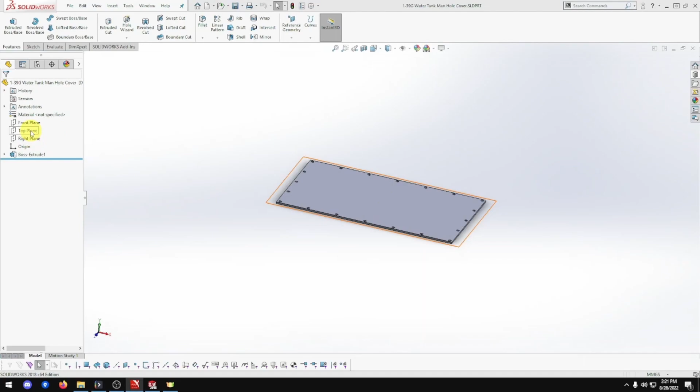Pretty much all we're doing is adding a handle to this. So we go to front plane, normal to. Sketch.

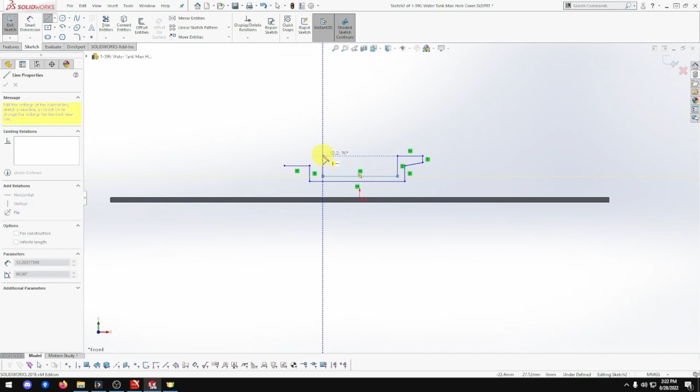The handle, you can make this part separate and assemble it, but I'm just going to do it on here. So let's see, there, across there, up there. Oh dang it. There we go, that's fine. Yeah, just make that horizontal. There we go. Now just make sure those two are there. Beautiful.

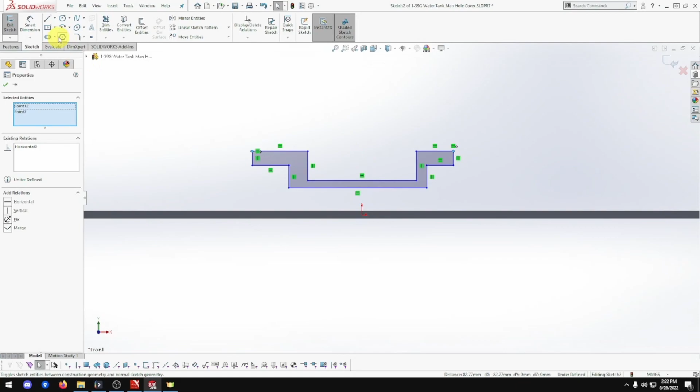Now actually, you know what, let me save a bit of time. Let me just delete that one. Put that one there. Oh, those two should have lined up. There we go, this will eventually join there. I'm just keeping it above so I can see. Now let me pull out these dimensions first.

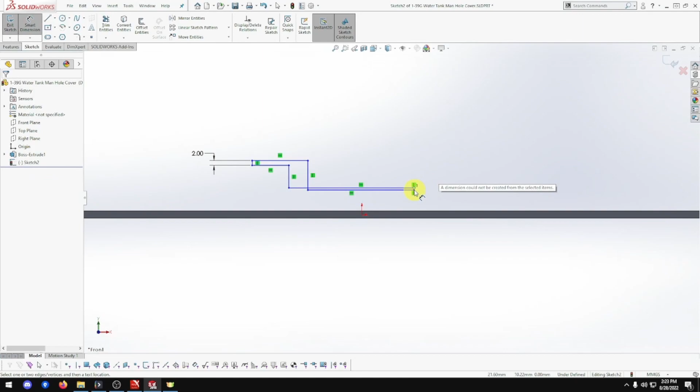So this is going to be 2 mil, 2 mil thick. Thank you, 2 mil. Those 2 points are going to be... oh missed. Okay, these two. Yep, I went too far. These two going to be 2 mil. Beautiful. I didn't get too far, it's going to be 2 mil.

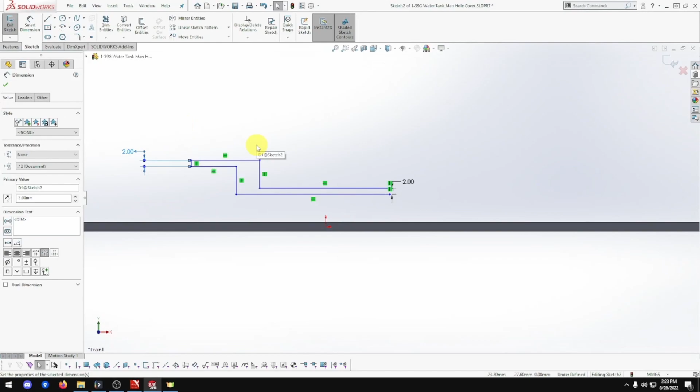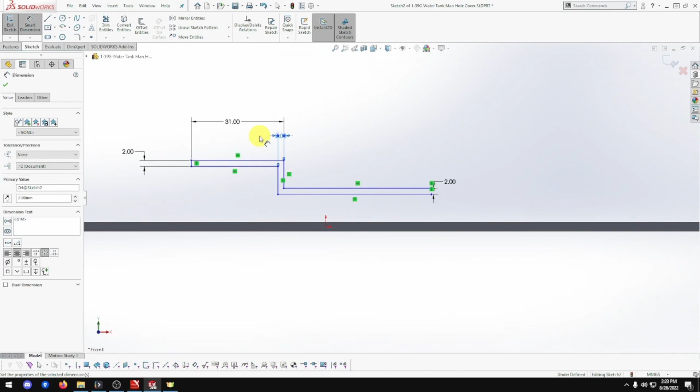Excellent. Okay, so now from this line here to that point there is going to be 31. From this line to this line will be 2 as well. 31. So from this here to that point, that point, thank you, is going to be 142 divided by 2.

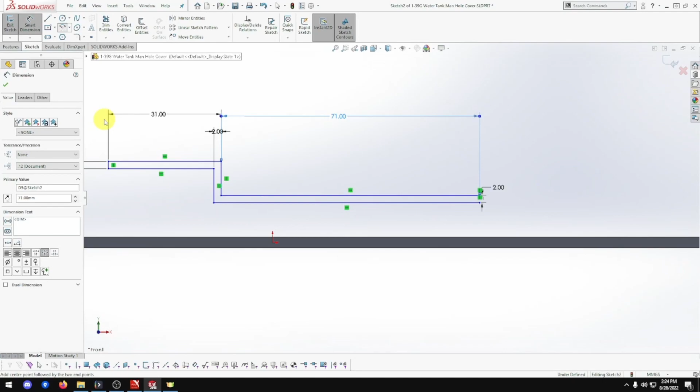Okay, so that should be all the measurements for now, but we want to do a curve there and a curve there. Okay, before we go any further, let me just do these up. Oh, right one, we want that horizontal, not vertical. At least now you can go around that way. And these two. There we go.

Now, before I lock that in, let me just do this. Going to be 5 mil, I believe that one is. Yep, radius of 5 mil. And this one's going to be 3. Yes, it is, 3 mil.

There we go. So this point and this line will join up. This point and this line will join up. This point and this line will join up, and join up. Now we're going further, this one trim. Those two, and those two. We still got to curve these two.

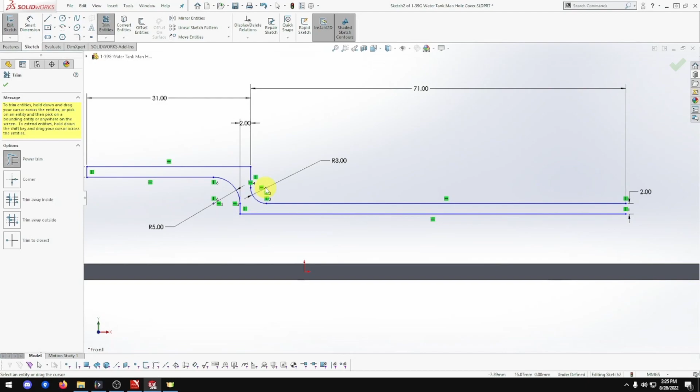Actually, you know what, why am I doing that? Delete that, delete that. We'll do fillet, that's going to be so much easier. We'll do fillet. Okay, so this point and this point will be horizontal. There we go.

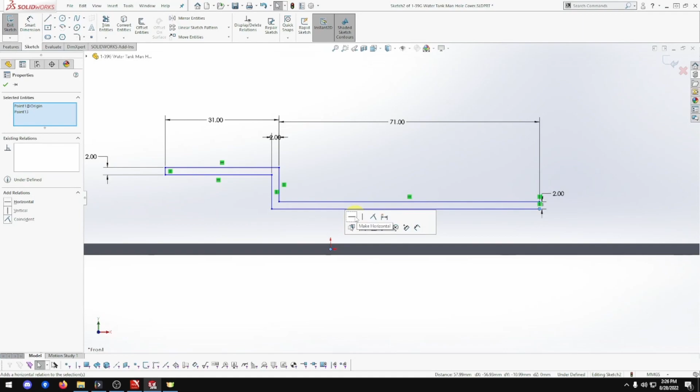Now, if we lock this point with this line, that should actually... why is that still? Oh, we haven't got height there, 25. Okay, we missed a dimension. 25. There we go, everything's locked in.

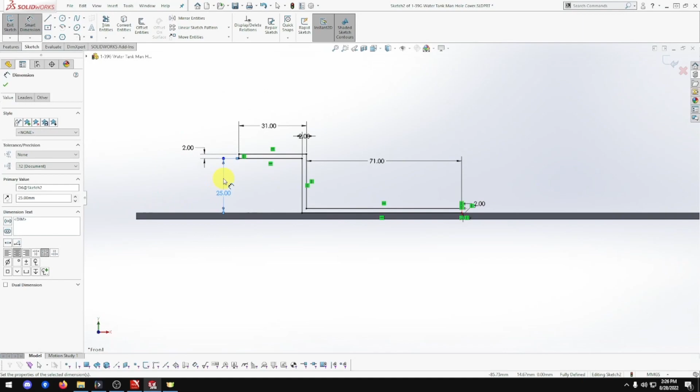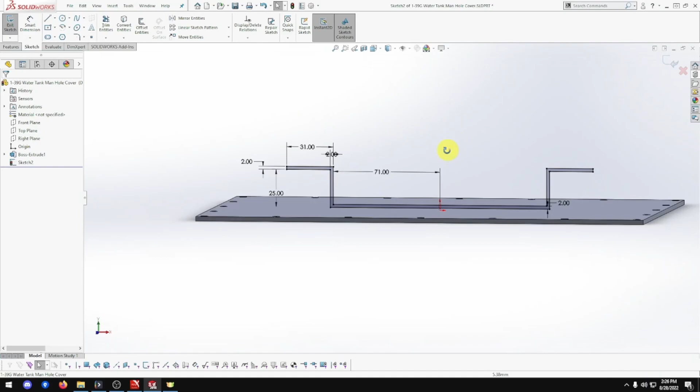Beautiful. Okay, so now we shall go mirror. We shall grab all the entities, and we shall mirror to the right side. And okay, that should close in. There we go, beautiful, and that's in the middle, which is what we want.

Now we want to go feature, extrude. That's going to be 20 mil, but it's going to be mid plane. We want middle. Okay, there we go.

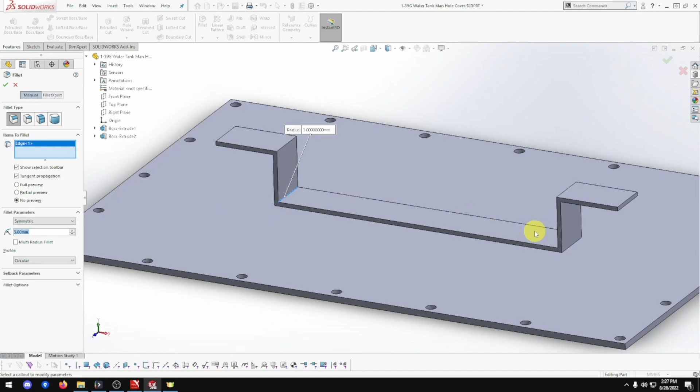Now save that. We want fillet. That's going to be 3 mil. It's going to be that line, that line, that line, and this line.

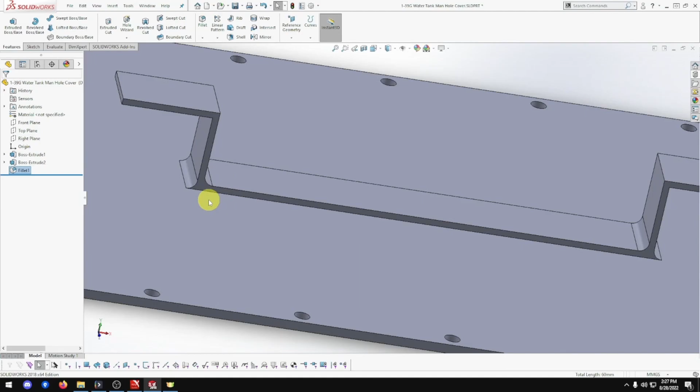That should have filleted around there because that's joined to that one. Yeah, it actually looks quite nice. So if you did a separate piece, that would be better off doing that one in the diagram.

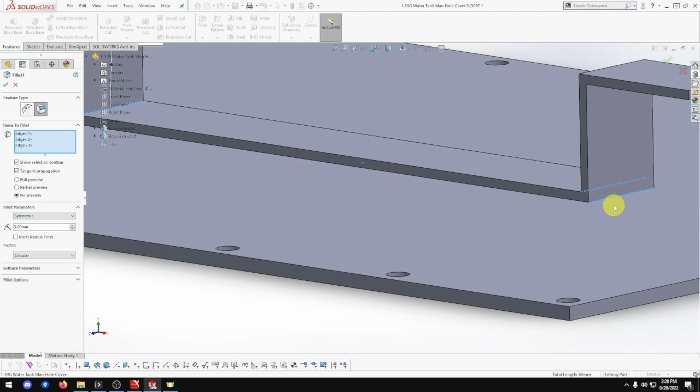So let's take that, let's unhighlight that one, and unhighlight that one. And okay.

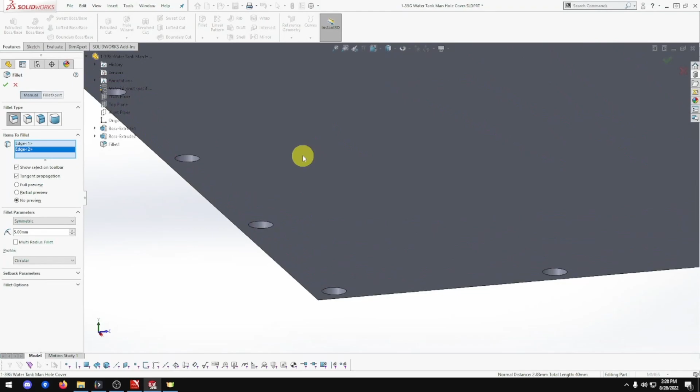So let's now do another fillet, but it's going to be 5 mil. That piece - oh, can't see, thank you. That piece. Oh sorry, a bit too much. Not piece, that line, sorry. The face, yeah, the edge. I want to make sure it's going the right thing. There we go. And that's looking good, let me save.

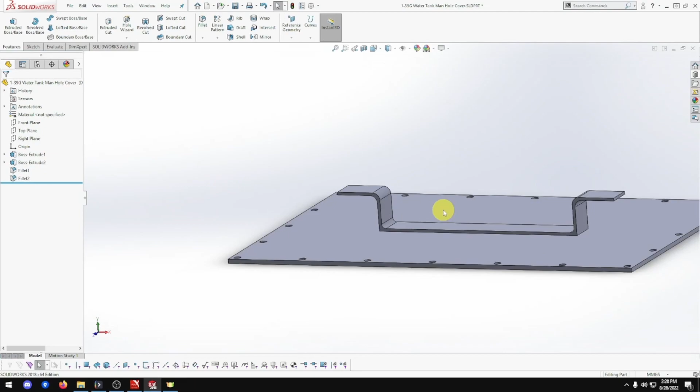Now let me go back to this one. Yeah, grumbling in the background, we got a storm coming in. It's not my stomach.

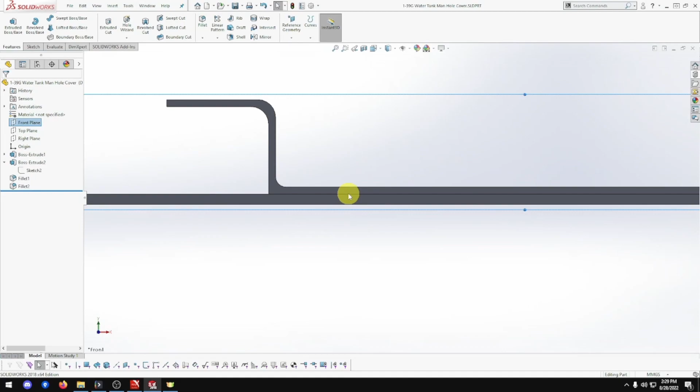Okay, so we want to go - actually before we do, get out of that one. Escape doesn't get out of there. Really? Thought it did. Let me just... nope. What the heck? Normal To, thank you. Is that hard?

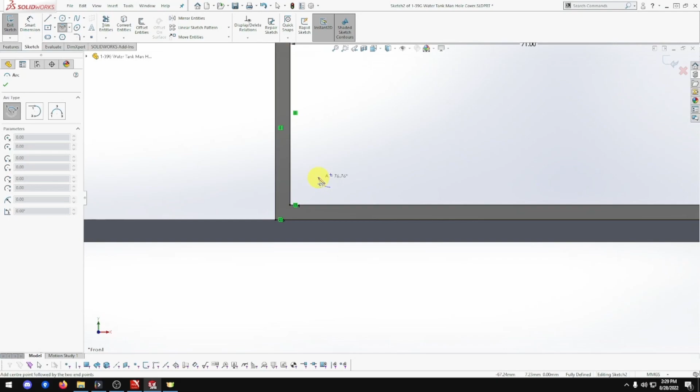Okay, let me edit that one. Now we want to put... oh seriously, I just... I don't believe I did that. Okay, let's try that again. Edit that one, let's now go to that one. Beautiful.

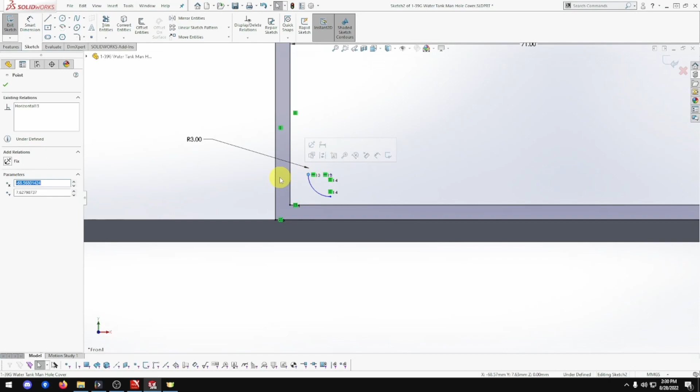If you've done this in mirror, we've done the other side, that's fine, doesn't take much to do. That was 3 mil. So those two will go there, and these - nope. I try to click on one that's already highlighted, it does not unhighlight, so unhighlight anything. Okay, that's going to be there, and that one's going to be there, and trim those two.

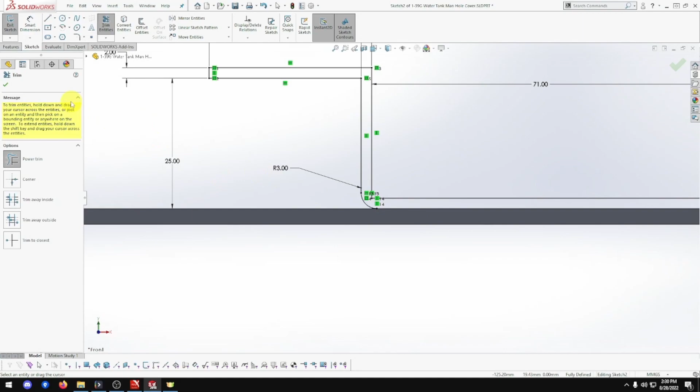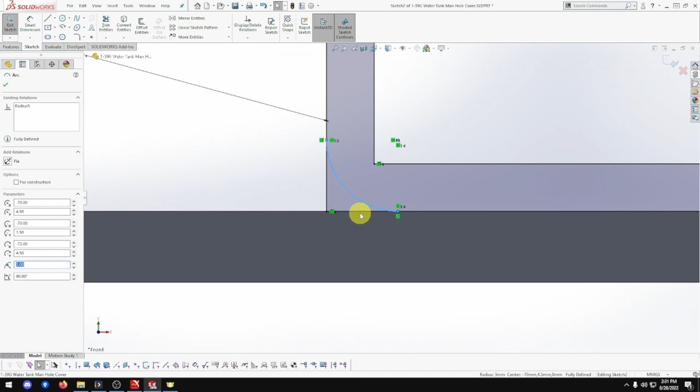Okay, why'd that break? Why is that not highlighted now? Interesting. Can't move anything. So why's that one? Oh come on, trim, thank you. Is there a piece there I don't see? Nope.

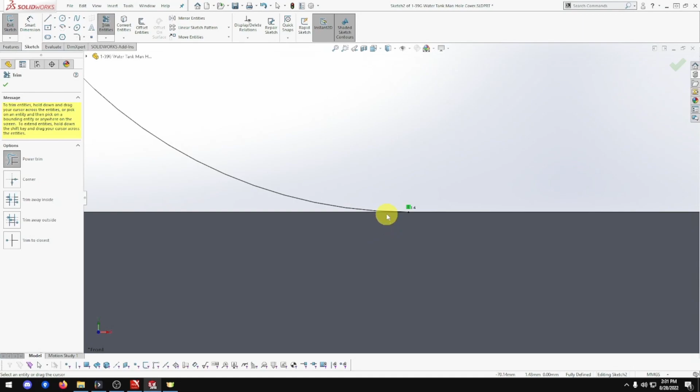Oh seriously? Okay, let me try something. Ah, trim. There we go, let me try something. Let me go there. What the heck? I didn't want full circle, I clicked the wrong one. Okay, let me go out there.

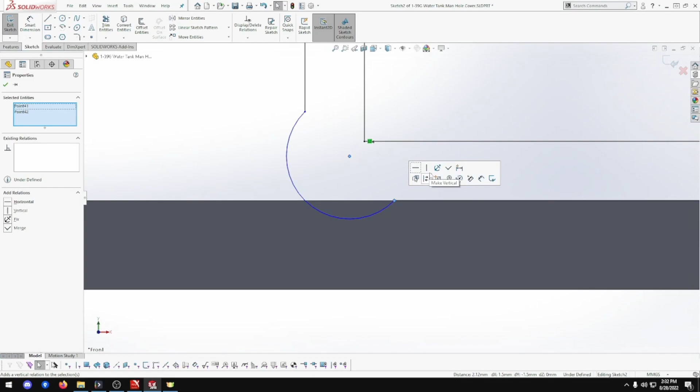Go there, let me do those two join together, and these two join together. That point and that point will be there. Why is that doing that? That's strange. Oh hold on, what the heck? Oh hold on.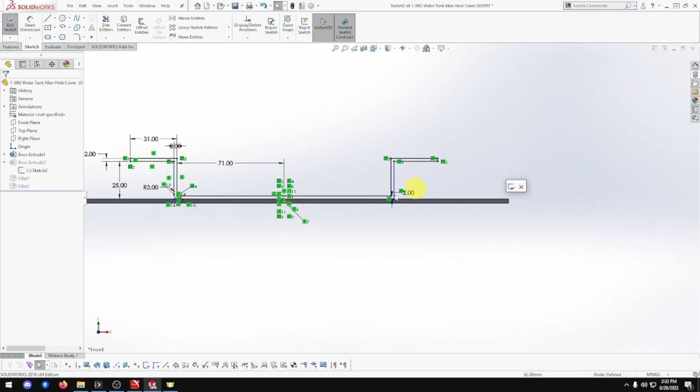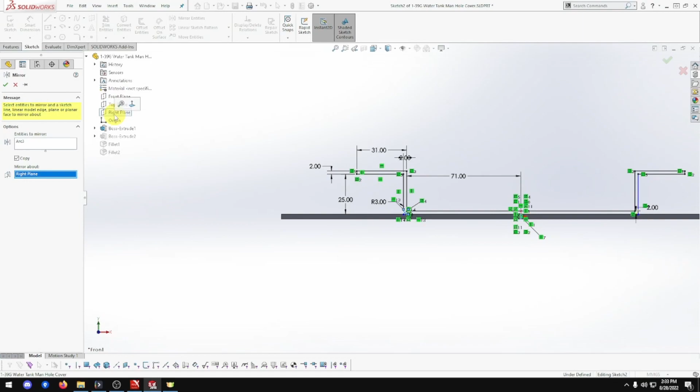Ah, because I'm mirroring. Ah, because it's not mirroring this piece. Let's mirror and see what happens. Okay. Trim.

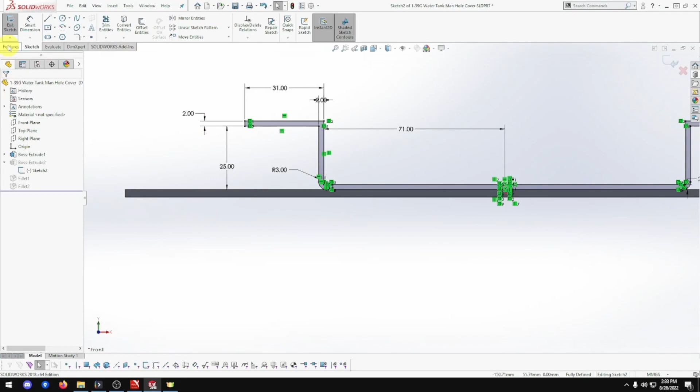Ah, there we go. The mirror was... I had to mirror it, then trim. Ah okay, that worked. Live and learn. There we go, then we got that piece on there. Beautiful, that should be that piece done. Yes it is, that's that piece done.

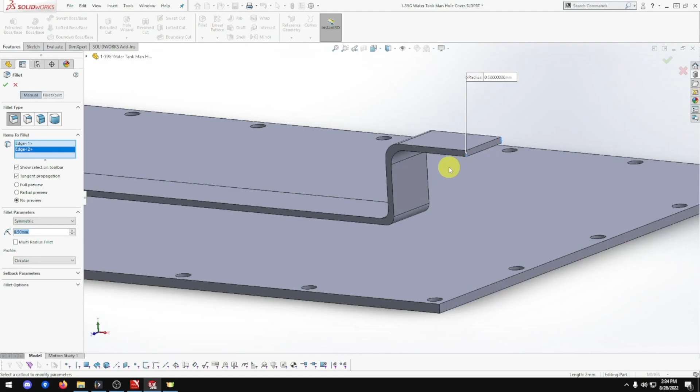But yeah, just to make it less painful, let's go to fillet, 0.5, take these sharp edges off. And okay, there we go, just take those sharp edges off. There we go, so that is part 139G, water tank manhole cover done.